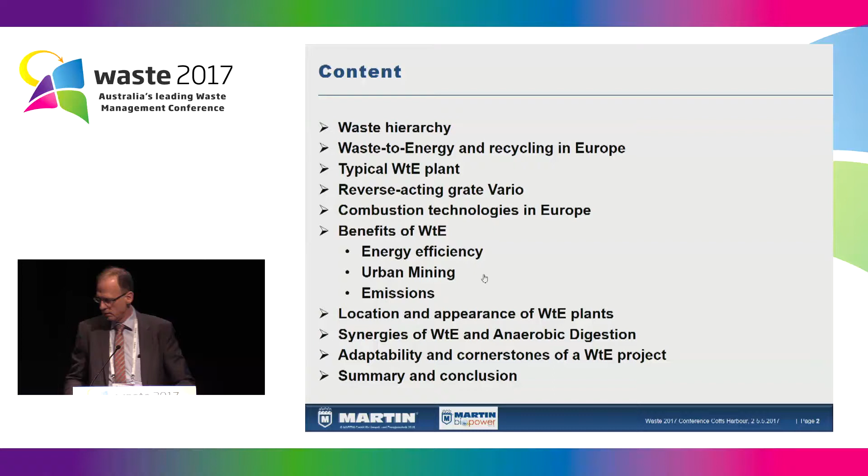Yeah, waste to energy. It's a pleasure for me to speak about waste to energy. The first thing I want to talk about is the waste hierarchy. Where is waste to energy in the context of the waste hierarchy?

So waste combustion, or waste recovery: a waste to energy plant is considered to be a recovery facility if the R1 factor is higher than 0.65. This R1 factor is a theoretical factor which gives an indication of the efficiency of the plant.

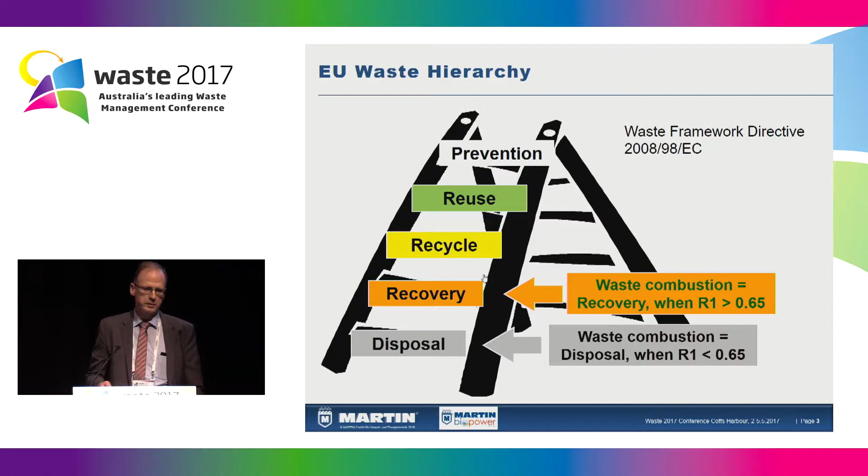So for electrical production only, the efficiency of the plant must be above 20%. That means from a thermal capacity of about 100 megawatt, we can produce about 20 to 23 megawatt of electrical energy.

So what happens with the waste in Europe? So on average in the European Union, we have a recycling rate of about 44%, and about 27 to 28% of waste goes to waste incineration and to landfill.

What we can see here for countries like Germany, Belgium, and Sweden, we have a recycling rate of between 50 and 64%, and the incineration rate is between 35 and 50%. In countries with a weaker economy, like Greece here, there is no waste incineration and a very low recycling rate, and about 80% goes to landfill.

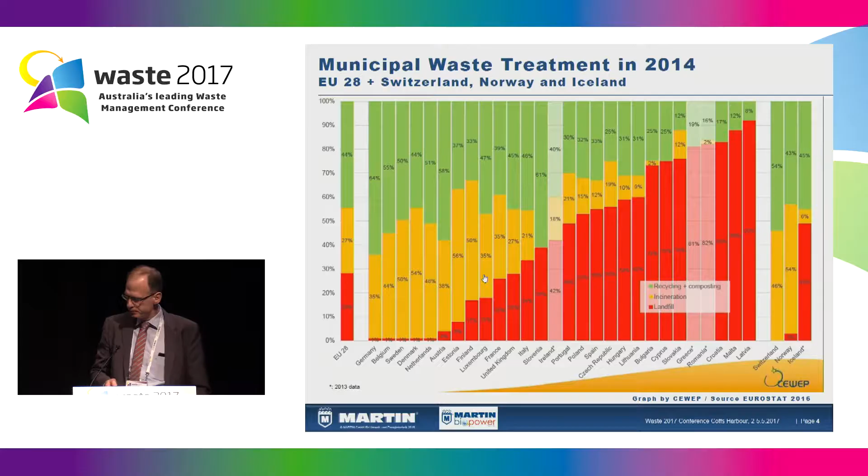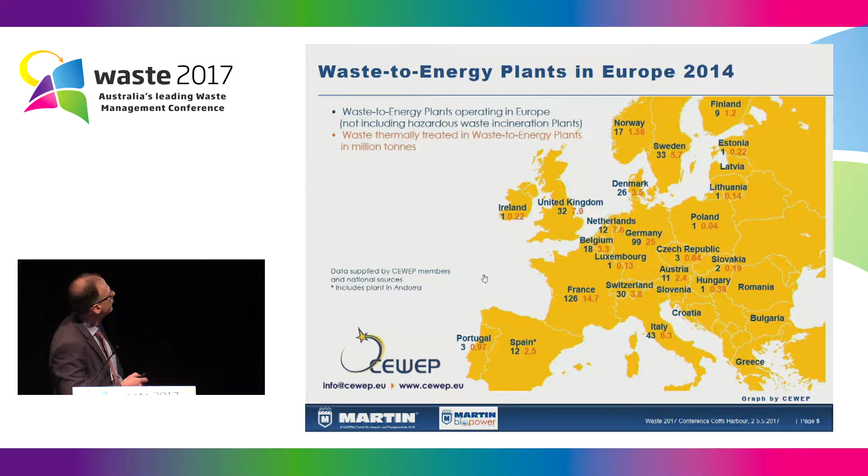So how does it look in Europe? Germany and France have about 100 waste to energy plants, and even small Switzerland, with a population of about 8.2 million, has about 30 waste to energy plants.

And that's the reason, from our perspective, that waste to energy is not competing with recycling, but with landfilling, because all materials, if they are recycled, usually are downgraded, down-recycled, and will eventually reach the end of their useful lifetime. And from our perspective, the best way to deal with this residual waste from recycling is to incinerate it and not to landfill.

Regarding landfill, it's recognized that it's not a long-term viable solution because of the emission of greenhouse gases, mainly methane, and the leaching into soil and groundwater. Therefore, waste to energy for mixed MSW and anaerobic digestion for source separated organic waste is attracting great interest worldwide.

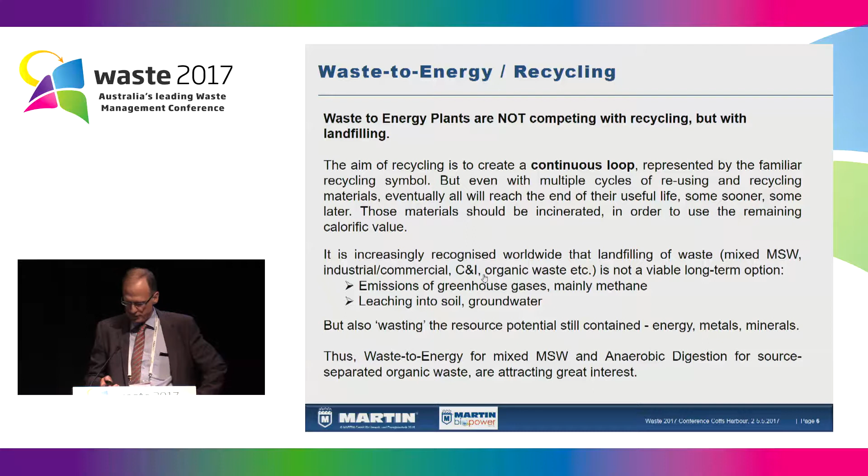So what does a waste to energy plant look like? From left to right, we have here the tipping area with a bulky waste crusher, if necessary, then we have here the waste bunker with the waste crane. The waste will be mixed in this bunker, brought to the feed hopper, goes down the feed chute, and here will be incinerated in the combustion chamber.

The flue gas goes through the boiler. The energy of the flue gas is reduced on the way through the boiler. Steam is produced, and here we have the flue gas treatment, and at the end the flue gas is released to the atmosphere through the stack. The energy production takes place here in a turbine generator set, and if possible there can be a steam offtake or offtake for district heating.

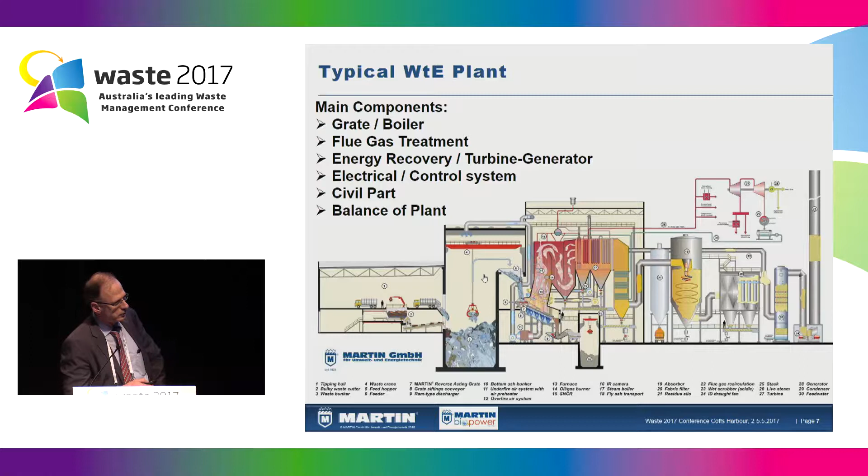Here a section through the grate. Here the waste comes down by gravity and static pressure, goes to the grate into the combustion chamber, and the fuel agitation takes place through these grate bars, which gives a very good combustion result with a very low remaining carbon in the bottom ash.

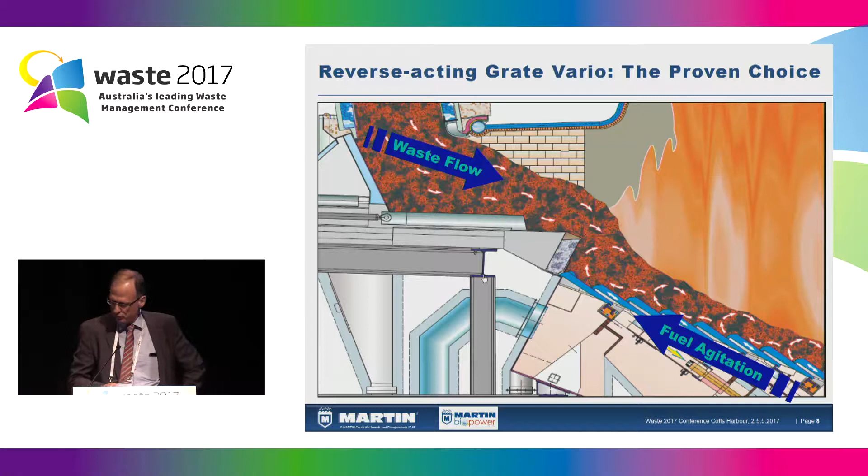So the flexibility of the grate system is remarkable. Grate incineration systems are used all around the world. We have a very low calorific value in China, starting with about 5,000 to 6,000 up to 8,000 kilojoule per kilogram. In Switzerland, for example, we have about 13,000. In some plants in Europe, we have a calorific value up to 15,000 kilojoule per kilogram.

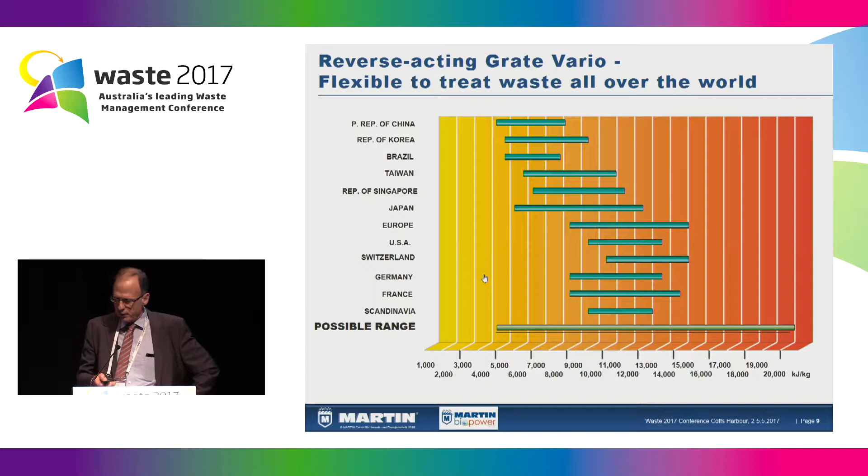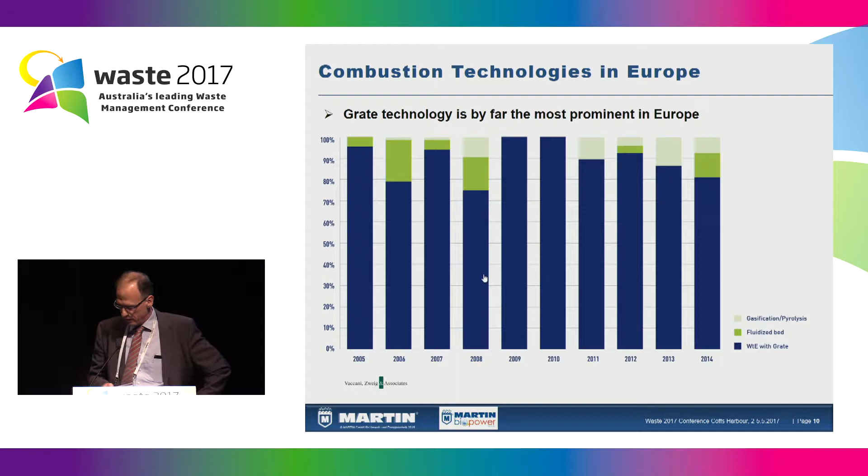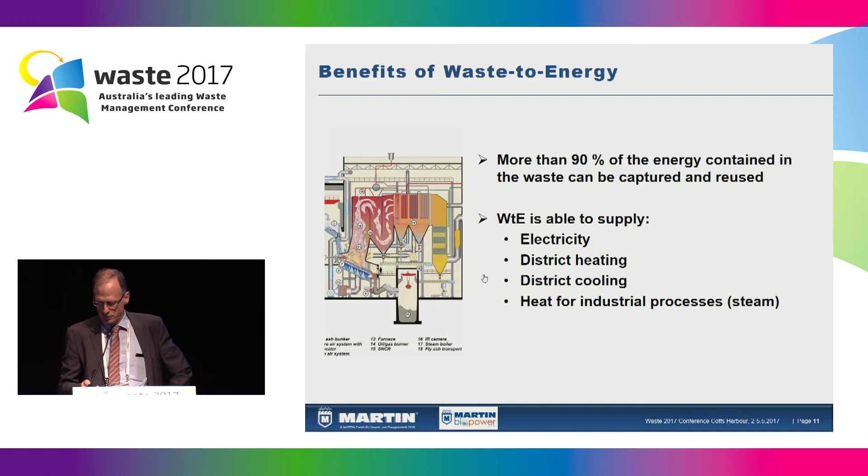So what are the benefits of waste to energy? More than 90% of the energy contained in the waste can be recovered if there is a combination between district heating, for example, and electricity production. The waste-to-energy plant supplies electricity, can be connected to district heating, district cooling, or supply heat in the form of steam directly to an industrial process, like a paper mill, for example.

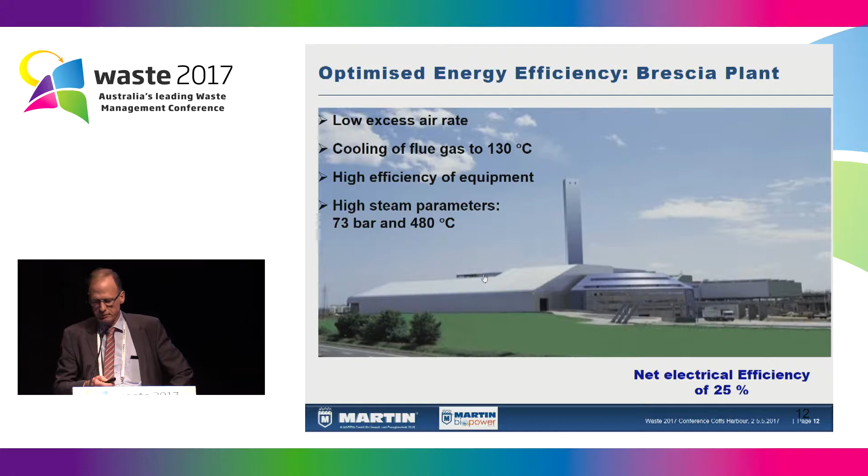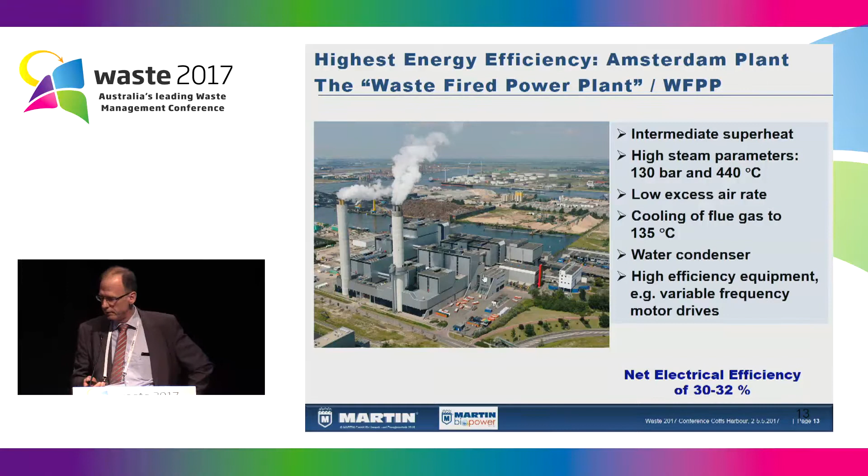The highest efficiency we have in the Amsterdam plant. People call it the waste-fired power plant because the net electrical efficiency is between 30 and 32%. Remarkable here are the high steam parameters with about 130 bar and 440 degrees.

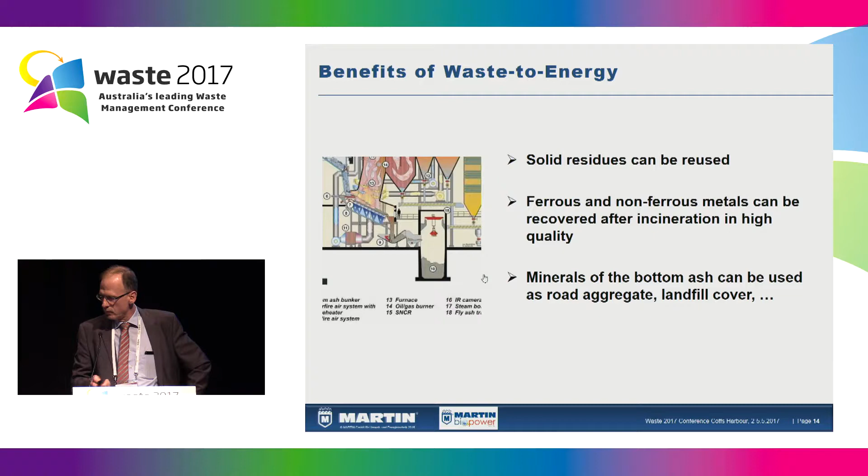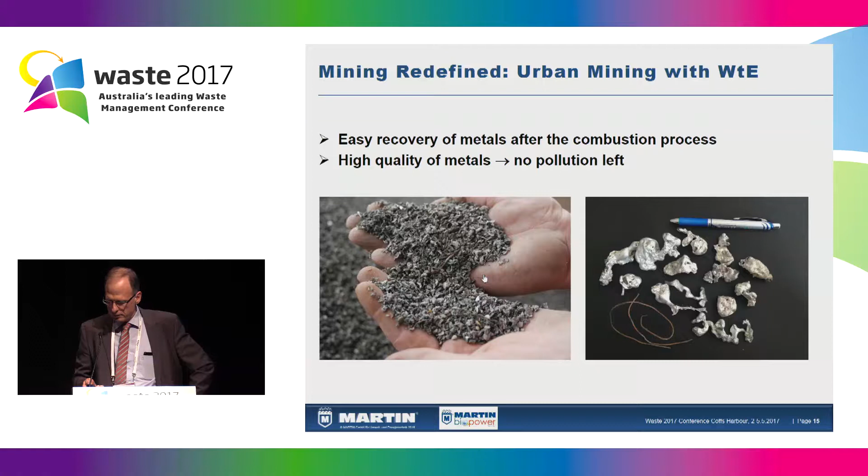Further benefits of waste to energy: the solid residues can be reused. I know the discussions here in Australia, but in Europe, the bottom ash is usually used for road base, for foundation construction, etc. And another advantage is that the ferrous and non-ferrous metals can be easily extracted. We can see some pictures here. On the right side, this is an alloy between aluminium and copper, which can be easily extracted with an eddy current extractor, and ferrous metals can be easily extracted by a magnetic separator.

The waste to energy plants introduced by us are all designed according to European standards. Therefore, the emissions are typically very low and well below the emission limits. Another advantage is that there's a pollution sink, you can say, that materials like heavy metals, for example, will be taken out of the recycling circle and will go to a secure landfill.

Dry flue gas cleaning systems are available to minimize the water usage. Especially in Australia, I think this is an issue, to reduce the consumption of water as much as possible. Waste to energy is clean, proven, and it will be continuously observed. The measurements at the stack will have a direct connection to the authorities. It will be constantly checked if the emissions are within the standards.

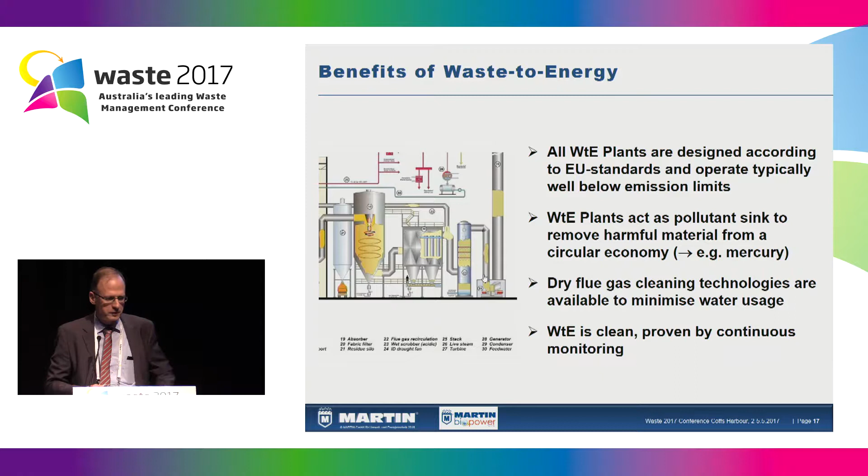Usually there are publicly accessible websites where everybody can watch the situation at the plant or which pollutants are generated. Usually in the beginning, when such a plant starts up, there is a lot of traffic on this website, and it goes away after a time.

So we have in Europe the Industrial Emissions Directive, which gives the waste to energy plants the most stringent emission limits of any industry, and it's only with the best available technology those emission limits can be reached. The result of that is that the emissions of the waste to energy plants are negligible compared to other sources.

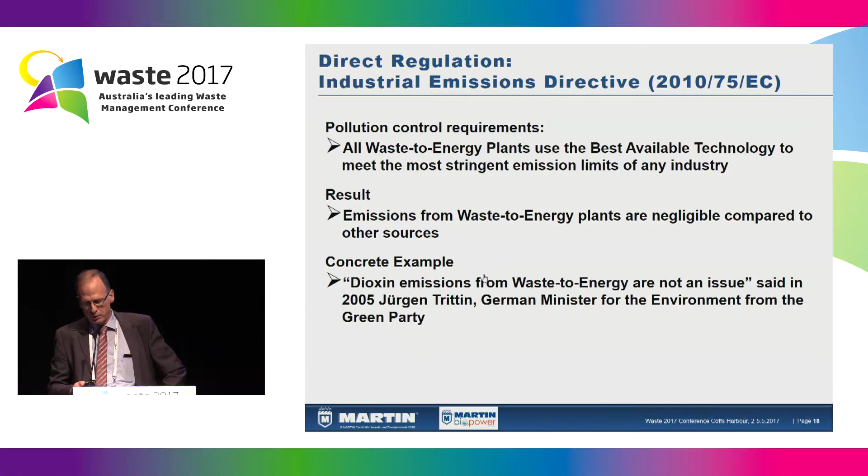And even our former environmental minister, Jürgen Trittin, member of the Green Party, said that dioxin emissions from waste to energy are not an issue. In fact, in 1990, the share of the total amount of dioxin released in Germany was about 1/3. In 2000, it was less than 1%.

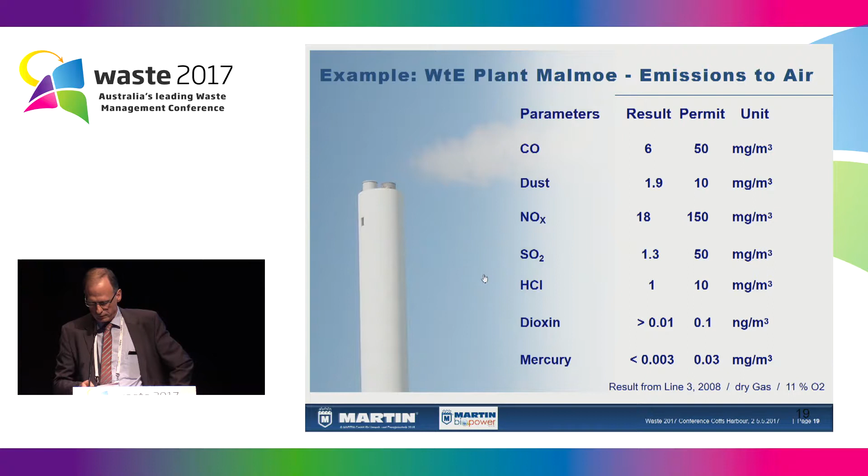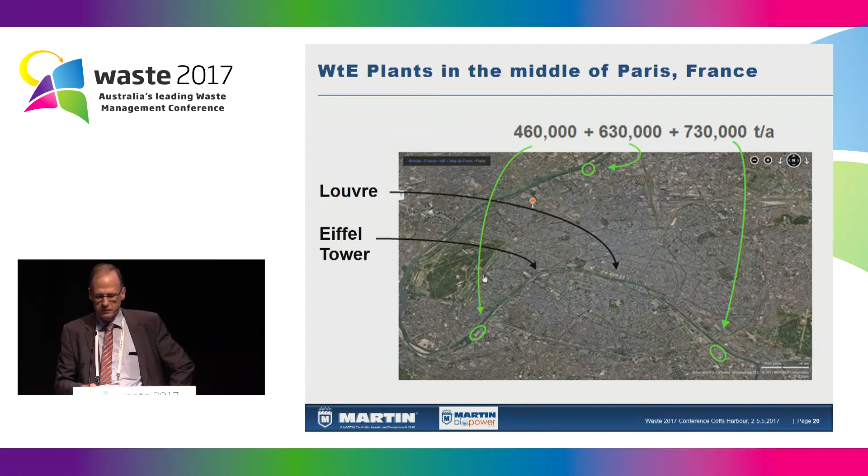And that's the reason why in Europe plants are built in the middle of the city. The black arrows are showing the Louvre, Eiffel Tower, and in the proximity of those tourist attractions, there are 3 plants with significant capacities.

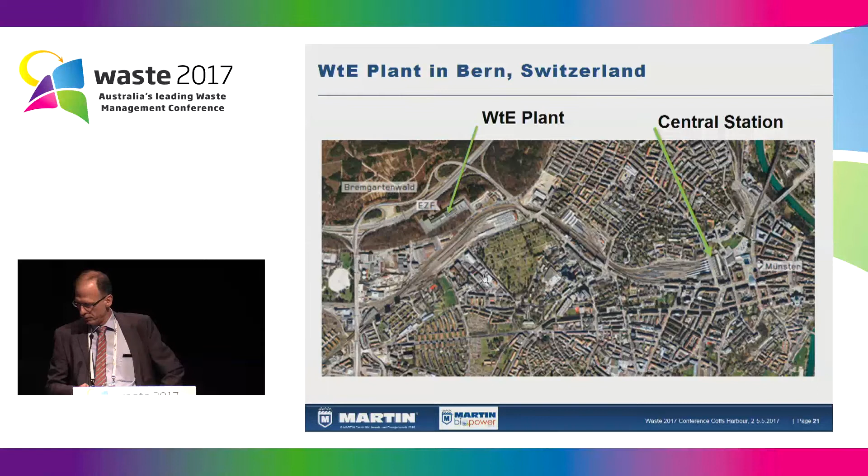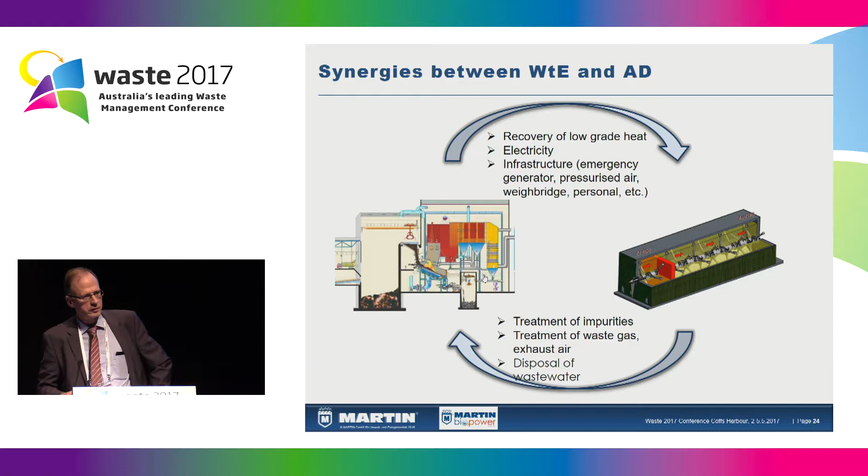Synergies between waste to energy and anaerobic digestion, I just want to mention that as well. If anaerobic digestion for source-separated organic waste and the waste to energy plant are built on one site, it gives a higher efficiency because a lot of the infrastructure can be used by both, and the low-grade heat can be used in the anaerobic digestion, and the wastewater from anaerobic digestion can be used again in the waste to energy plant.

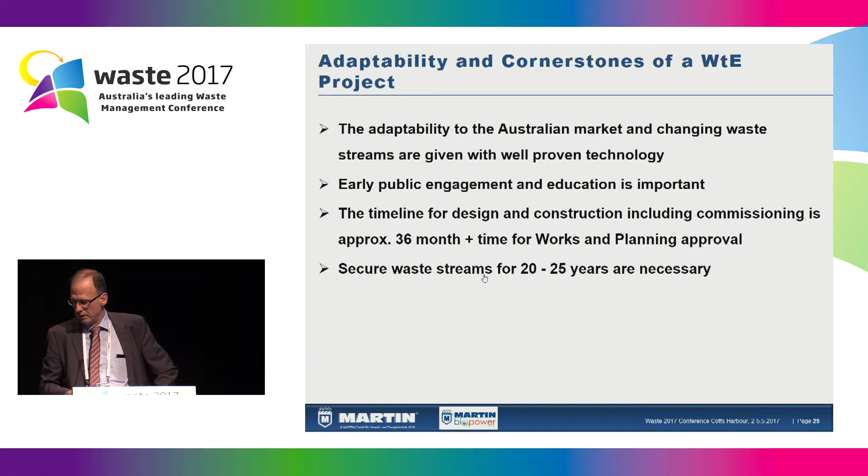What is important for a project as well is a secure waste stream, which has to be in place for about 20 to 25 years. So the summary: the net electrical output of a waste-to-energy plant is between 550 and 900 kilowatt hours per ton. For the Australian market, we guess we would be somewhere between 650 and 700 kilowatt hours per ton. The electrical efficiency might be between 20 and 24%. The combined efficiency, if we have an offtake for steam, can reach above 90%.

The waste-to-energy plant can be located wherever it's necessary. We have seen that they are sometimes practically in the middle of the city, and can as well be built close to a big energy off-taker. The energy from waste-to-energy plants is to a large scale CO2 neutral because of the high amount of renewables we have inside the waste.

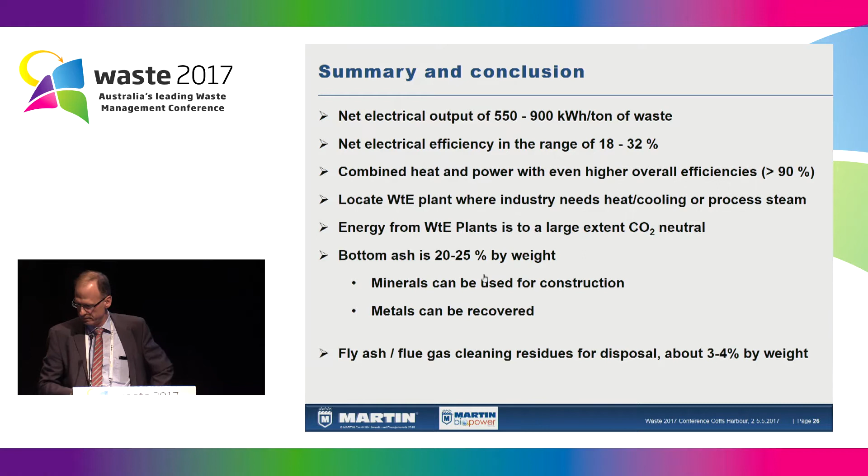The amount of bottom ash in the incineration process is about 20 to 25% by weight. Minerals can be reused for construction purposes. Metals can be recovered as well. The fly ash residues are what really need to be landfilled. This is an amount of 3 to 4% of the incoming waste. So that means that the diversion from landfill is about 95, 96%.

The waste-to-energy technology, which is grate-based, is well proven, reliable, and has availability usually more than 90%, 92%. So it runs usually 8,000 hours, and after 8,000 hours the plant is stopped and we do a revision, and this is the case for a lifespan of 25, 30 years. There are even older plants around.

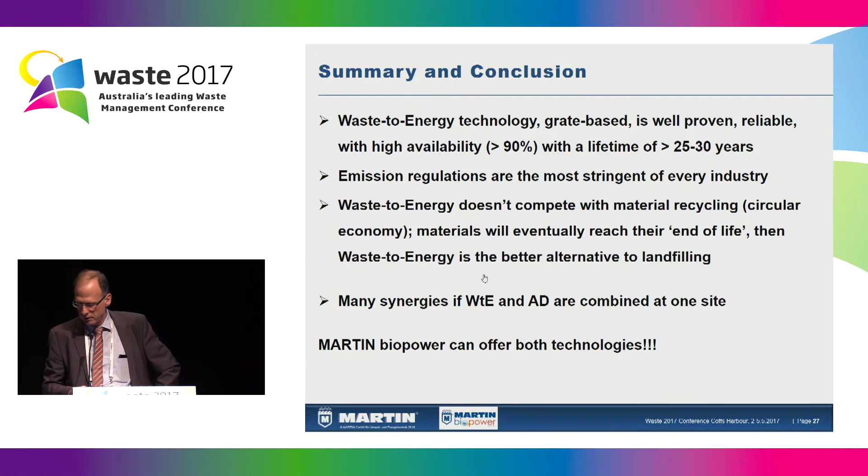The emission regulations are the most stringent of every industry, which is important for public consultations, so there is no harm from waste-to-energy plants. And as well, very important is that waste-to-energy doesn't compete with material recycling, because all recycled materials will sooner or later reach their end of life. And last but not least, there are many synergies if waste-to-energy and anaerobic digestion would be combined at one site. So that's the end of my presentation. Happy to answer questions if you have.

Are there directives in Europe that require the waste to go through recycling facilities before it's burnt, or are all of these mass burn? There are regulations, but it's not required to go through a recycling process. We are flexible regarding the incoming waste, so it need not be sorted. Regarding the sizes, we can receive waste of about 800 by 500 by 800, something like that, and that goes down to RDF, which is quite small.

Ron Wainberg, MRA Consulting. Those facilities in Paris and Vienna, in Copenhagen and so forth, what sort of gate fee do they charge for the waste? And is there a state subsidy of some sort for the processing of the waste through those facilities? In other words, what does local government have to pay to get the waste processed there? I'm not sure. I know in Germany there was a time where they had a very low gate fee, about $75, when there was not much waste around. But then it went up to, let's say, $150 or even above.